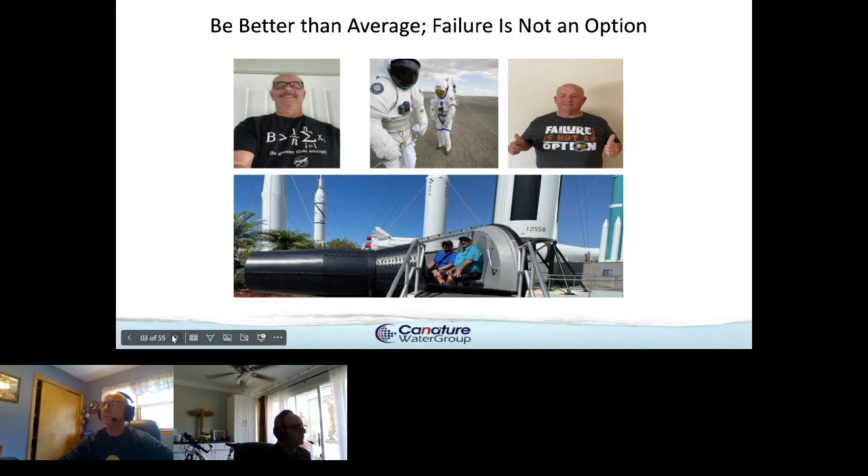Go ahead, Mike, take it away. Let's roll. So why water treatment?

You know what? You go on a call, maybe it's municipal water, and you do your regular job, and it never enters your mind that there's more to it or there should be more to it.

So with that said, your purpose today is to introduce you to the contamination issues that exist in the water supplies today. Oh, are there contamination issues? Fasten your seatbelt. So the process: we will introduce you to current contamination problems and let you understand how these problems can be overcome.

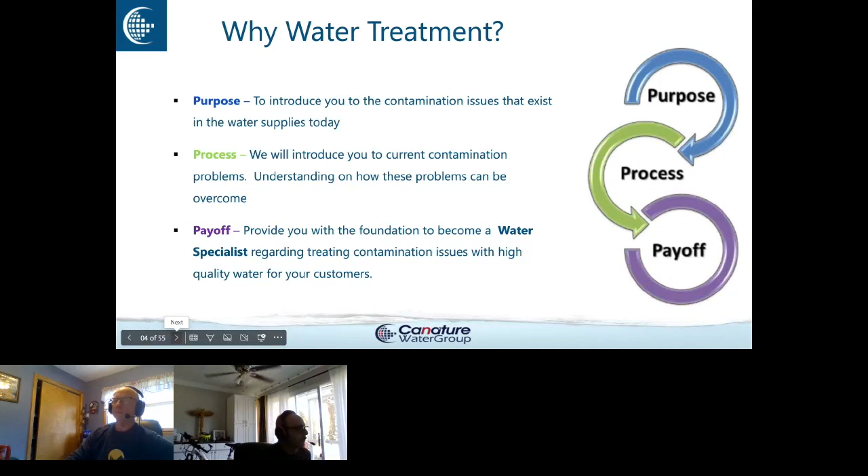And the payoff: provide you with the foundation to become a water specialist regarding treating contamination issues and making sure that your customers have the highest quality water available. Okay, click it, Leah.

All right, so let's talk about some of the biggies.

PFAS - have you ever heard of that? The forever chemical. Well, it's all over the news in the US, and we'll explain to you why possibly you've not heard about it in Canada.

Lead, microplastics - are you all dragging around those plastic bottles to chug-a-lug out of? Probably, right? Chlorine, chloramines, hardness, chromium. You remember the Erin Brockovich movie? That was about the contamination of chromium. Next slide.

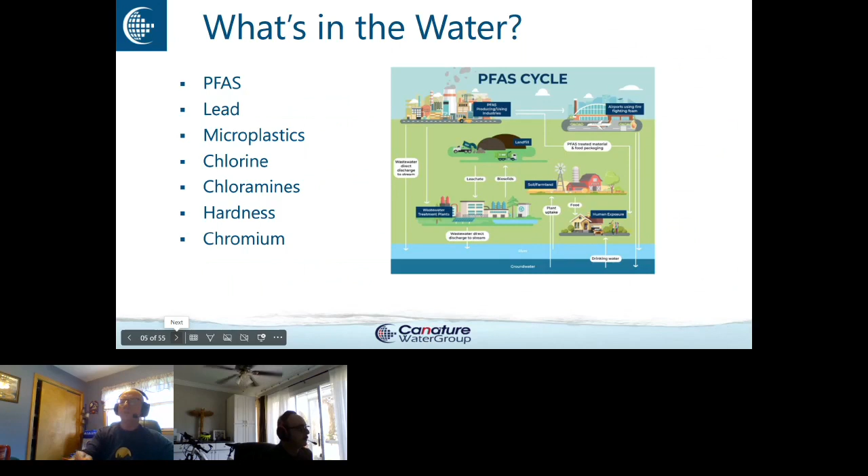All right, polling question number one. Go ahead - if a lake is clear and blue, is it safe to drink? True or false? Yeah, just grab a straw and put it right down in there.

All right, so go ahead and click it. So do you have the polls loaded, Leah? To see what the reaction is? I do, sorry, I was just trying to get back on stage.

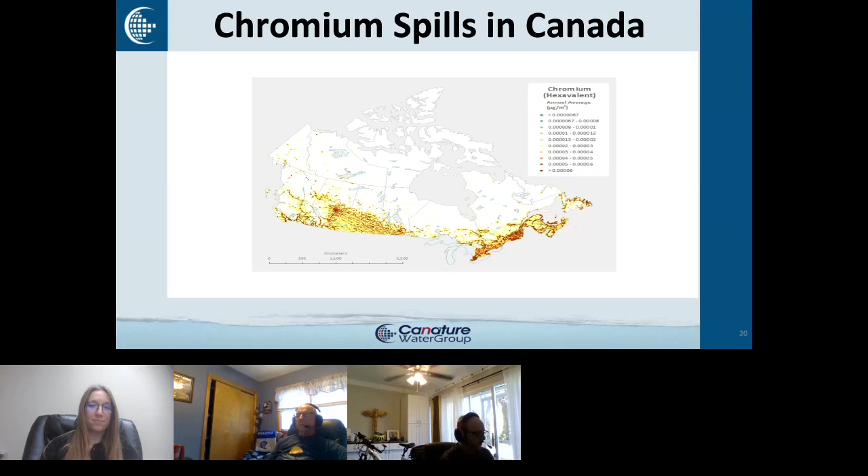All right, lead poisoning, a whole other thing, especially in children. It's a sad thing—a lot of our supply pipes are made of lead, especially on the lead up to the home, and those obviously should be changed out. But there are some things you can do inside the home to help protect your customers, and you can do a lead test—they're very easy to do. Next slide.

Here we have a map of chromium in Canada. Oh my gosh, it's there. All right, so take a look—is it in your area? Probably. Next slide.

All right, so let's take a look at some of the solutions.

Reverse osmosis is a solution for PFAS, and not that I'm going ahead and pumping my product, but nonetheless this is certified. You always want to use, especially when dealing with harmful substances—arsenic, barium, chromium—all of these substances that can cause immediate health concerns, products that are NSF certified for 58. There are other certifications, but they have nothing to do with taking the contaminants out. Don't be fooled. Next slide.

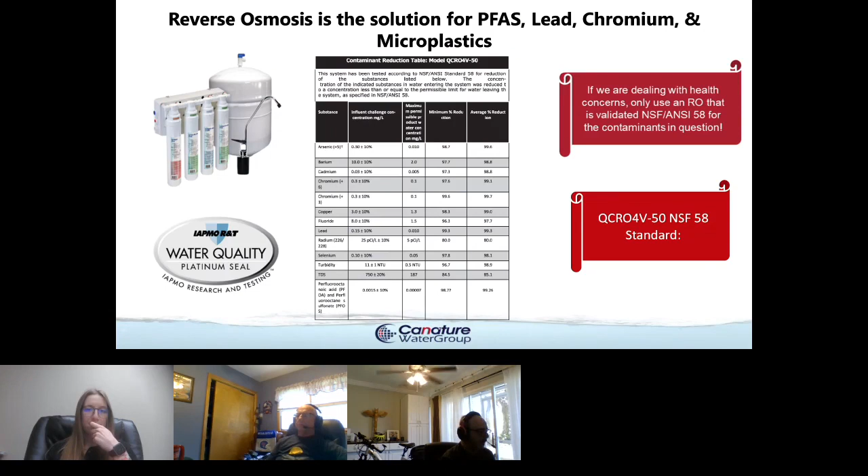All right, so making water safe, municipal water. Oh my gosh, the municipalities—you call it hydro in Canada, the water supply, is that what they call it? Okay, so Hydro Canada, they wouldn't send you anything that would be harmful in the water, would they? No, no way, they're going to make sure it's spiffy as can be, right?

All right, let's look at chlorine. Oh, they put that chlorine in there. Well, chlorine causes trihalomethanes, or THMs—that's when chlorine reacts with organic matter, that's the byproduct. And there's a lot of places in Canada that use chloramines. What is chloramine? This is a real good combo—chlorine and ammonia, give me a couple of shots of that, right? Well, that makes nitrosamines—DNA damaging, cancer causing disinfection byproducts that form when water is treated with disinfectants like chloramines. Next slide.

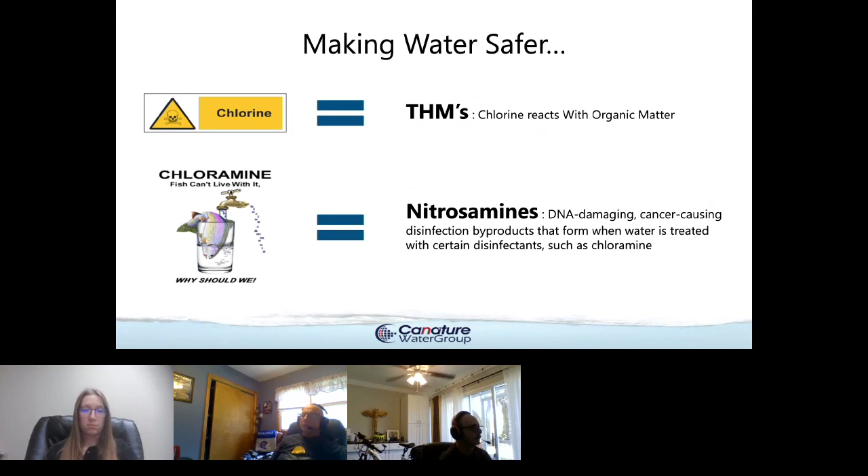All right, so let's take a look at one of the remedies. I'm done being Dr. Doom—let's fix it, let's fix it now. Yeah, Dr. Fix It here.

All right, so carbon, granular activated carbon or GAC, is generally accepted as the best all-around adsorbent—not absorbent like SpongeBob, this is an adsorbent, it sticks to the surface. It's available for removal of organic chemicals and organic contaminants. In addition, it's used for the removal of tannins, phenols, pesticides, detergents, trihalomethanes or THMs, and toxic organic compounds. So charcoal carbon filters are the most effective at removing chlorine particles such as sediment or VOCs, taste and odor. However, they are not effective at removing minerals, salts, and dissolved inorganics.

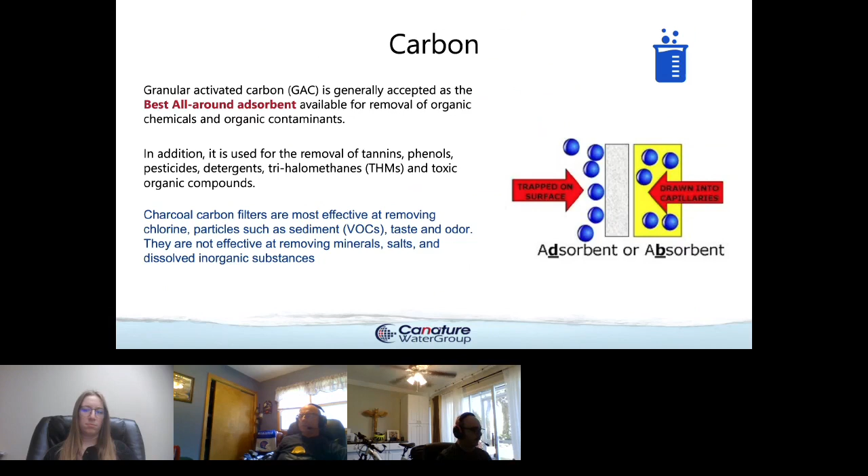So why remove chlorine and chloramines? I went on a job in Tampa, Florida for a huge condominium. I mean, it was like, I don't know how many stories, but a big building. And I'm not a plumber, I make no bones about it, but this was really big pipe, thick stuff. It ate right through it in 3 years. 3 years, think about it.

They're irritants to the eye, skin, and respiratory system. It damages plumbing and rubberized parts in the plumbing system. So what are you gonna do when these chloramines come for you? Next slide.

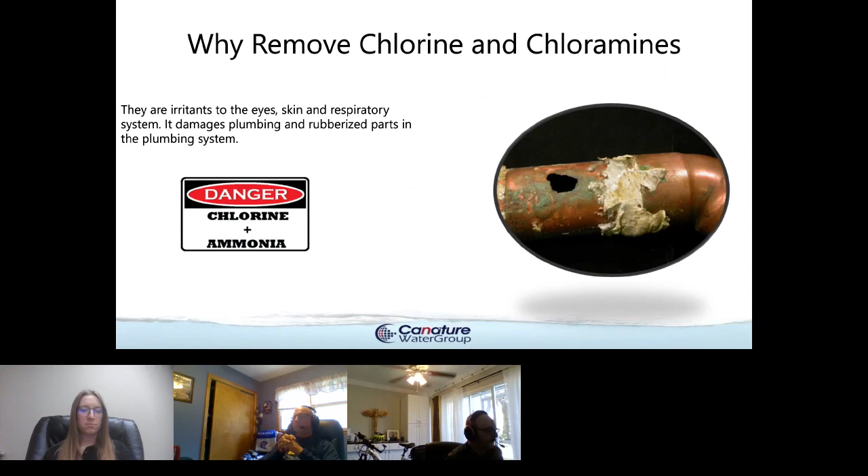All right, here we go. Leah, there you go, you're on board now. I'm back, all right, it's polling time.

Granular activated carbon removes hardness. True or false? Let me think. Did he say that? Oh, yes.

Okay, let's put our votes in. We got one vote in. It should be live already, guys. Come on, guys, take a shot. Oh, there we go, we got a couple more. All right, who said you miss 100% of the shots you don't take? You all know that? The great one, right?

Right, all right. Do we want to keep it open? Okay, let's give it another 10 seconds. Put our votes in, all right. Come on.

Okay, ding, all right, I think we got enough time. All right, so we're going to end the poll. So poll number 3, we had 4 votes for true and 3 votes for false. So a little bit torn. Let's see what the answer is. We got some people abstaining, hey? They're scared to answer correctly. We don't know who's saying what.

So the actual answer is false. Carbon has no ability to remove hardness. None at all, ladies and lassies. All right, next slide.

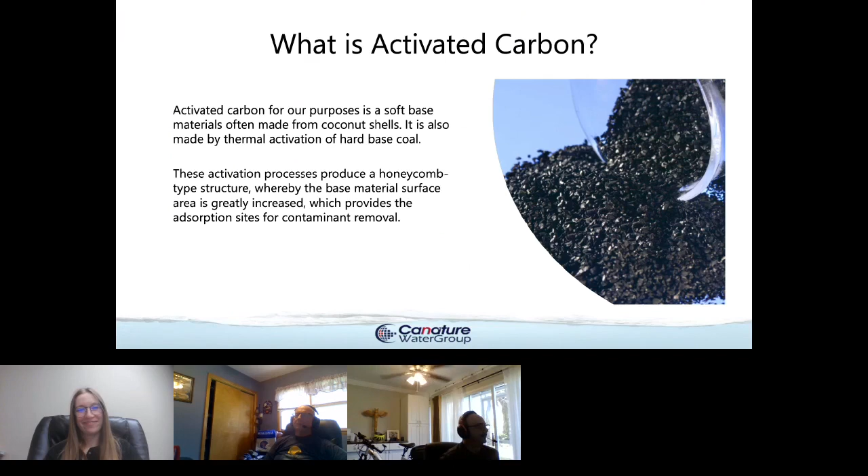So how does adsorption work? Adsorption is a physical process in which suspended matter, liquids, or gas adhere to the surface or the pores of the carbon in the absence of a chemical reaction. Adsorption is not the same as absorption, in which one substance is taken into the body, okay SpongeBob, of another substance. Adsorption is onto, it sticks to the carbon and will not come off. Absorption is into, not commonly used in water treatment. Next slide.

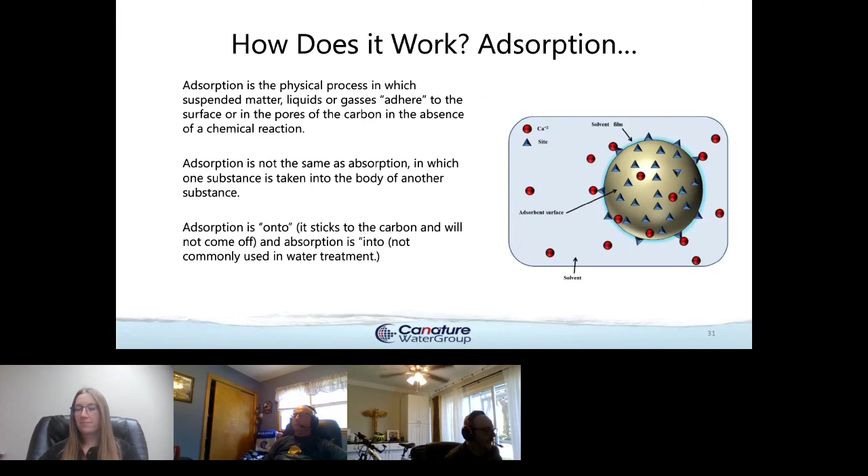All right, applications. Activated carbon has a super high affinity for chlorine, it takes out a ton. Proven reliability, excellent projected life expectancy. However, we recommend, not just us but the Water Quality Association, a minimum of 1 cubic foot. 1 cubic foot of carbon will be able to handle 3 gallons a minute, that's it for doing the job effectively. If you put one of these rinky-dink little cartridges on, it's not going to do the trick for you. So it reduces 1 part per million of free chlorine from 1 million gallons of water. Who said that, $1 million? In addition, carbon is used for the reduction of phenols, pesticides, detergents, trihalomethanes, THMs, and toxic organic compounds.

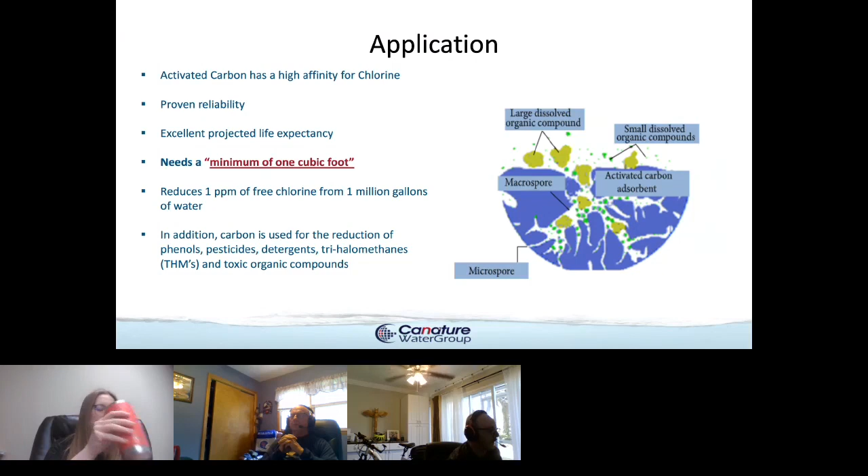Next. Hey, here we go again. Polling question number 4, all righty.

Activated carbon may be made from coconut shells. Let's go ahead and light up the polls. Do you have to put a lime in it? I don't know.

All right. We can't see who's saying what, so don't be afraid. Yeah, don't think that we see. Oh, I don't want to be wrong. They might see that I don't know. You know what? I did just vote myself this time. I haven't voted in the past, but I did vote true. All right. Good. That's a correctamundo. Oh, is it? Okay. I gotta submit it first.

Okay. I'm gonna end the poll. All right, last chance. And we've ended it. Okay, so we had 7 voted true, 3 voted false. So let's see what it is. It is true. Yeah. All right. All right, next.

Huh. Get the heck out of here. There's some coconuts. Coconuts are a great renewable source. You want to talk about renewability? Right here. You're looking at it. So coconut shell carbon is one of the most common carbons in use today. Unlike charcoal-based carbon, which is more expensive and more difficult to activate, coconut shells are easily converted to granular activated carbon. And here's the process.

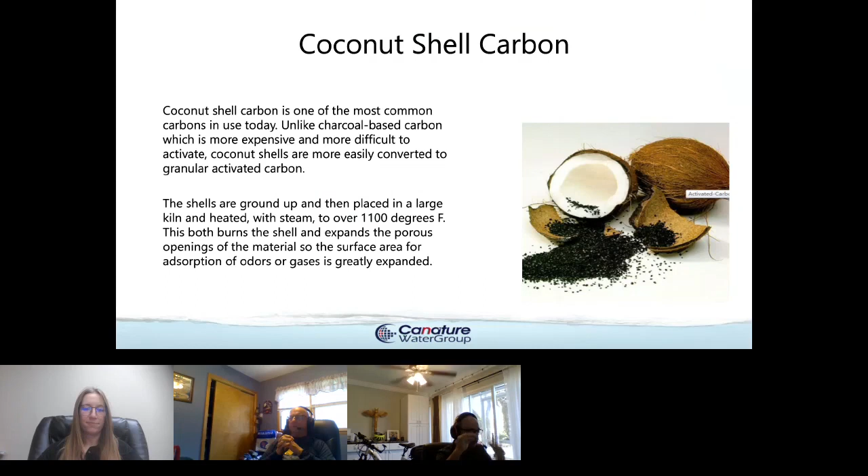The shells are ground up. They're placed in a large kiln heated with steam to over 1100 degrees Fahrenheit. This both burns the shell and expands the porous openings of the material. The surface area for adsorption of odors and gases is greatly expanded. Everybody get that, or you want me to slow down? All right. Coconut shell carbon is very effective, and it's a lot less expensive than bituminous coal, which is a great source. However, it's a lot more expensive and more difficult to get to. Next.

Look at this. Polling number 5. This one has different answers now, it's not just true or false. 1 pound of carbon has enough surface area to cover 100 square kilometers, the Great Bear Lake, 10 football fields, or the province of Alberta. Hmm. 10 Canadian football fields. Oh, man.

Did you know the Great Bear Lake is the largest lake completely in Canada? No, I did not. All right, listen, I lived in Canada for 5 years. I know all this stuff.

All right, I'm gonna end the poll, guys. Last chance. Forever hold your peace. Oh, someone else voted. Good, you made it in. All right, it's ended. So we had 5 votes on 100 square kilometers. We had 0 votes for Great Bear Lake. We had 1 vote for 10 football fields, and then we had 5 votes for the province. So let us see what is correct. Boom. Oh, it's 10 Canadian football fields. Yeah. Great surface area. All right. Next. There it is. There's a picture of it. Counted 10 football fields.

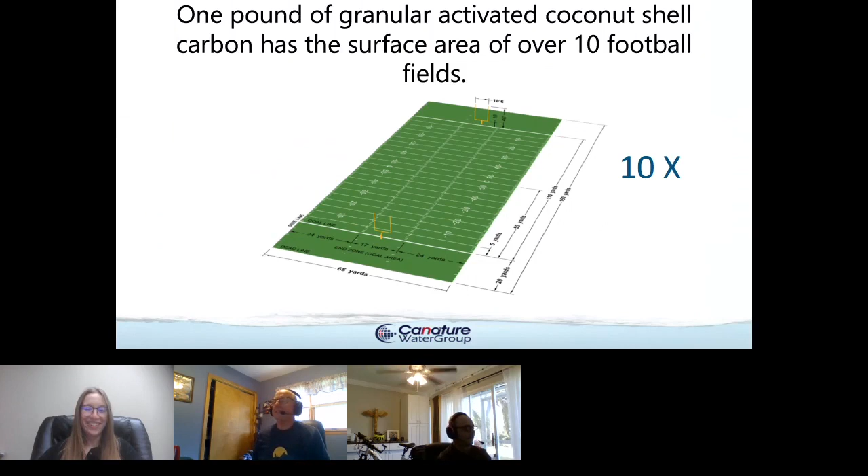All right, next. Contact time is of utmost importance. Organics and toxic organics require even more contact time than chlorine or chloramines. Here's some examples. Free chlorine, 1 to 2 minutes. That's what I'm saying. You need a cubic foot to be able to do the job. Chloramines, 3 to 4 minutes. Organics, 5 to 6 minutes. And toxic organics, 8 to 10 minutes. So if you have toxic organics and you're using carbon to remove it, then you're probably going to have to go larger than 1 cubic foot, right? Just as an example. Next slide.

All right, let's talk about catalytic carbon. Catalytic carbon is regular carbon on steroids. Catalytic carbon is created by altering the surface structure of activated carbon. It does a better job, it lasts longer, and you can bring it back around. Backwashing it refurbs it, and it's ready to go again. It is modified by gas processing to change the electronic structure. It creates a higher level of catalytic activity on carbon for reducing chloramines and sulfur in the water. This added catalytic functionality is much greater than that found in traditional activated carbons. I'm trying to click to the next slide.

Well, hold on, Mike. We just got a question. It says, the city has been doing their spring runoff water cleanup, which I believe uses chloramines. Would GAC be the best filter of choice? No, that's not correct. You would want to use catalytic carbon. I'll tell you, when I first moved to Florida, they had chloramines, and I put a regular GAC filter on my house. It'll run right through it. Didn't touch it. You have to use catalytic carbon. It's the only thing that'll take it out.

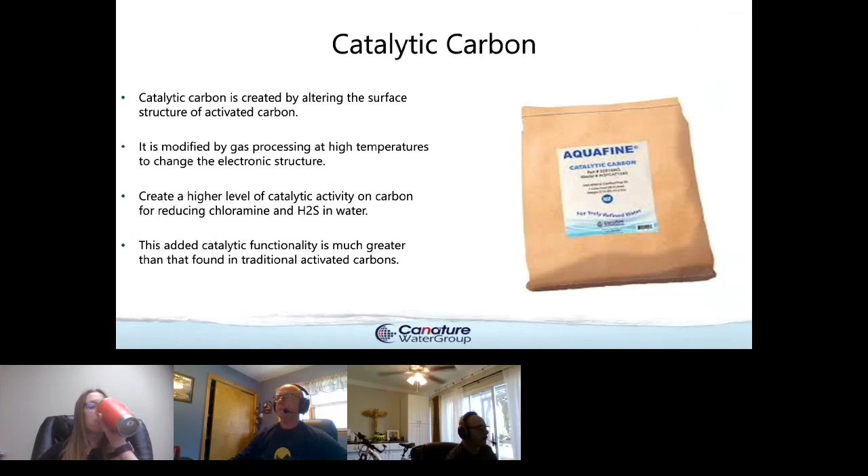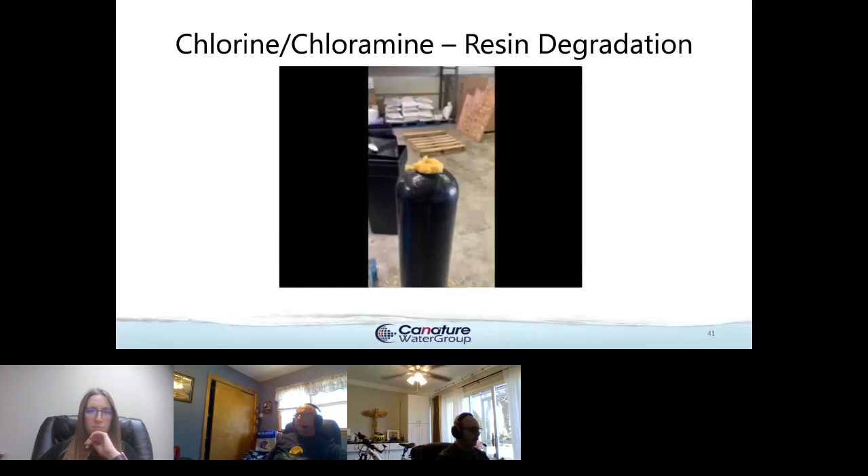So if you looked at it, it would be like a ball of string. And what holds that string together is the crosslinks. Well, what happens is that it oxidizes the crosslinks, breaks it apart, and this is what happens. It turns to jelly. Pretty soon you have no flow, and this does nothing except block the water. So when there's chloramines or chlorine, you have to put carbon in front of it to protect it. And you're protecting the people from other stuff. We talked about it, VOCs, etc., right?

Okay. Next slide. You have to click it again.

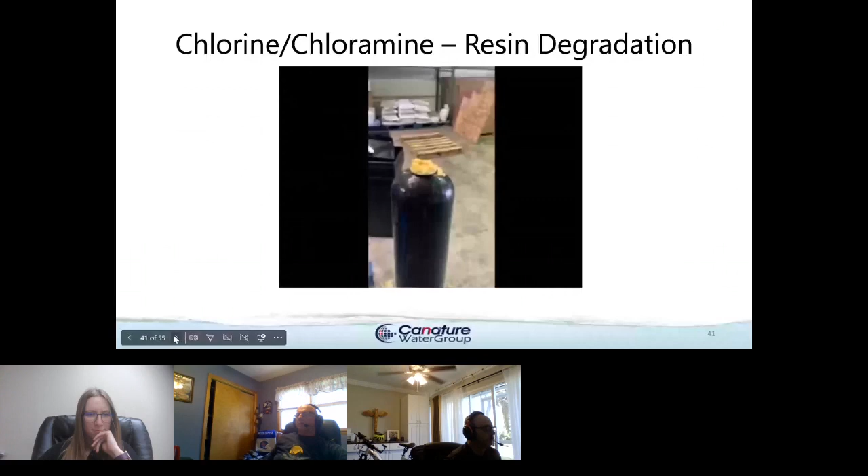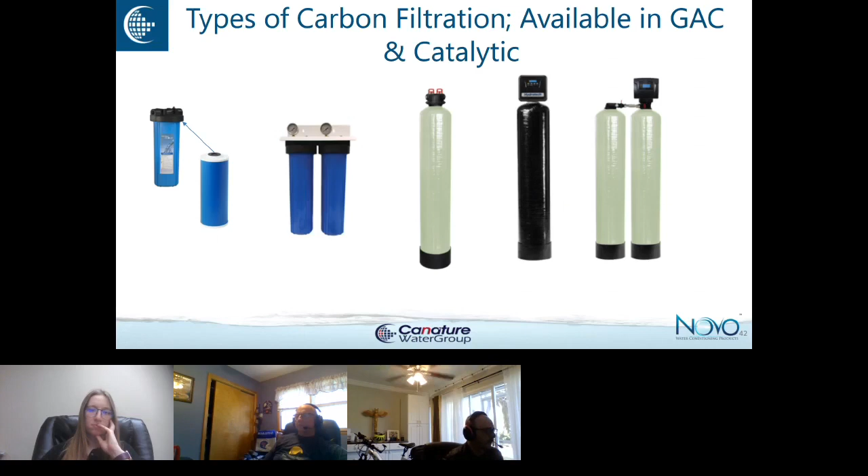Well, huh, number 6. All right. So hey, what's the best way to find out what's in the water? You taste it, you smell it, you test it, or you let the dog drink it. Or Mikey. We have a few comedians in here because the last one did get a few votes. Yeah, give it to the dog. Who let the dog out, right? All right. Couple more seconds. I'm going to close it, guys. Get your votes in. All righty.

So we had nobody who tasted it, so that might be good. But we had one that said smell it. We had 10 that said test it, and then we had 2 comedians that voted let the dog drink it. If the dog doesn't fall over, it's good. I'm with the 10 people. All right, let's see, the answer is obviously... Yeah, go ahead, click it down. There, yeah, test it. Test it. It's the only way. There can only be one.

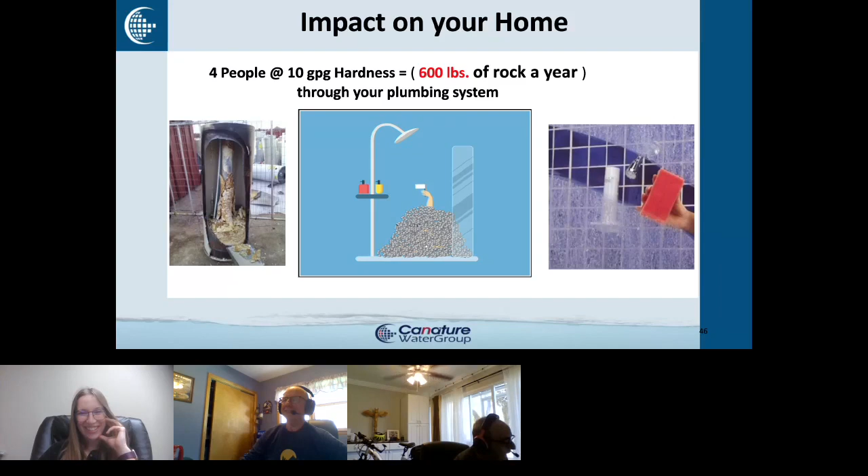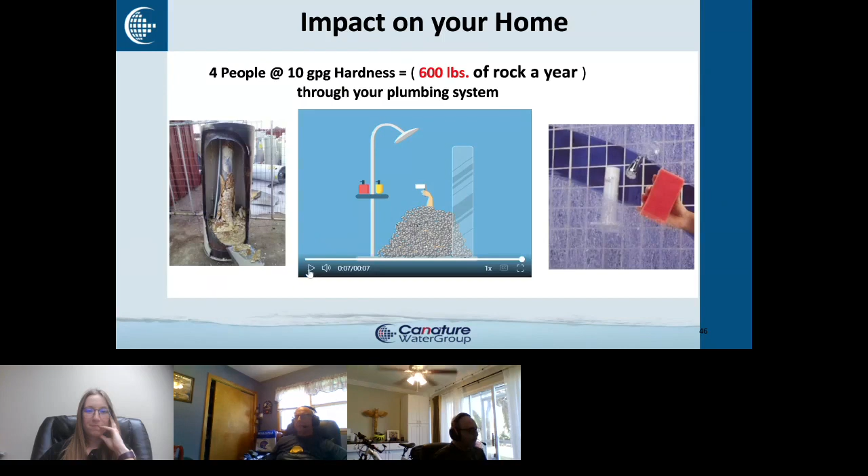Hit it again. All right, so with that said, the impact on your home: 4 people at 10 grains per gallon of hardness is equal to 600 pounds of rock a year going through the system. That's not like chicken feed, all right? That's not nothing. That's a lot of stuff. Take a look at this water heater on the left. How many years was that in, Dave?

Yeah, I found that it was in service for only 4 years, and it was being protected by the template assisted crystallization, the TAC media. Looks like it did a great job, huh? Oh, it's not working. All right, next slide.

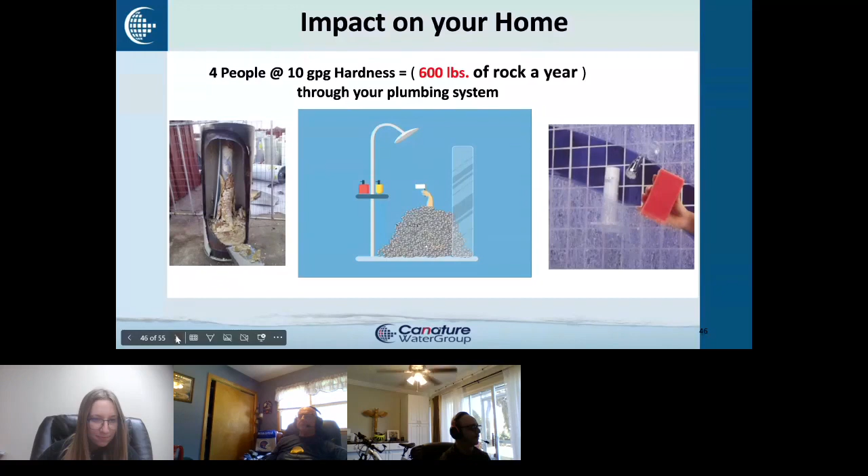All right, third-party certification. I can't emphasize this enough that you should make sure products you're using are certified. And don't let them use the leaching certification because that doesn't tell you anything. In other words, the vessel itself isn't leaching contamination into the water. I mean, that's important, but you're putting equipment on to accomplish a goal. Make sure that it's been certified for that. So the Battelle study by the WQA had that done. It proves that placing a salt regenerating water softener ahead of a water using appliance makes those appliances more efficient. Calcium hardness makes appliances inefficient and fail sooner.

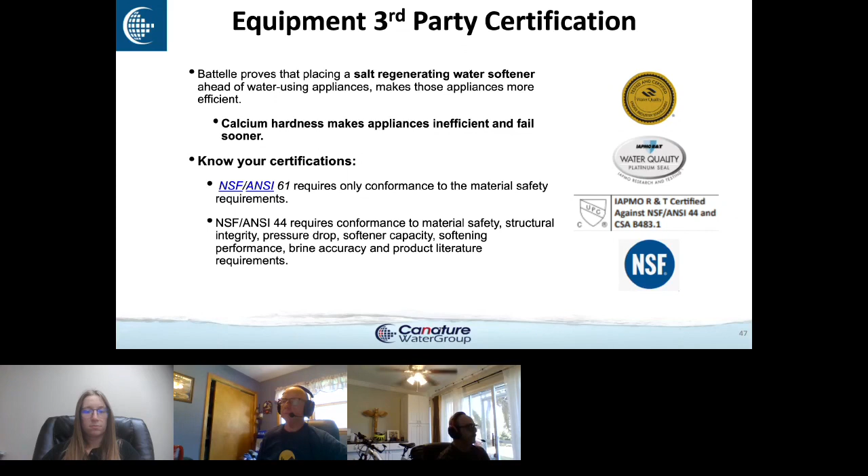So know your certification. NSF ANSI 61 requires only conformance to the material safety. NSF ANSI 44 requires conformance to material safety, structural integrity, pressure drop, softener capacity, softening performance, brine accuracy, and product literature requirements. NSF, IAPMO, CWQA, all of these are valid certifications. If they had the certification done in Hungary, don't count on it. Make sure it's a North American certification and that it's ANSI 44. NSF ANSI 44. That's the one you want to look for. Go.

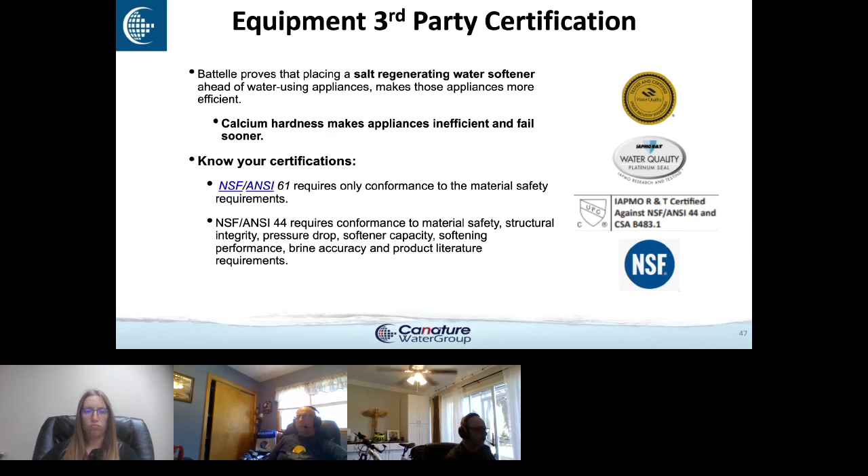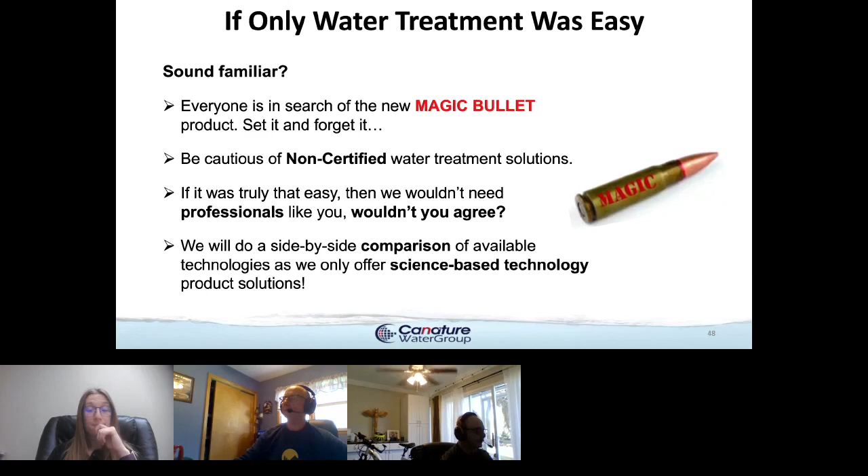And somebody says you see a bicycle in your office there, Mike. Yeah, I belong to two bike clubs, actually. Mike the bike. I do about 40 miles a day. Yeah. All right, next.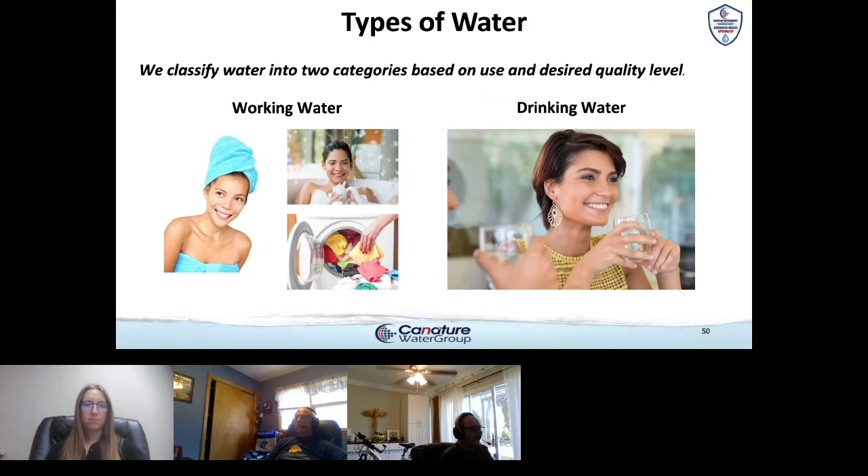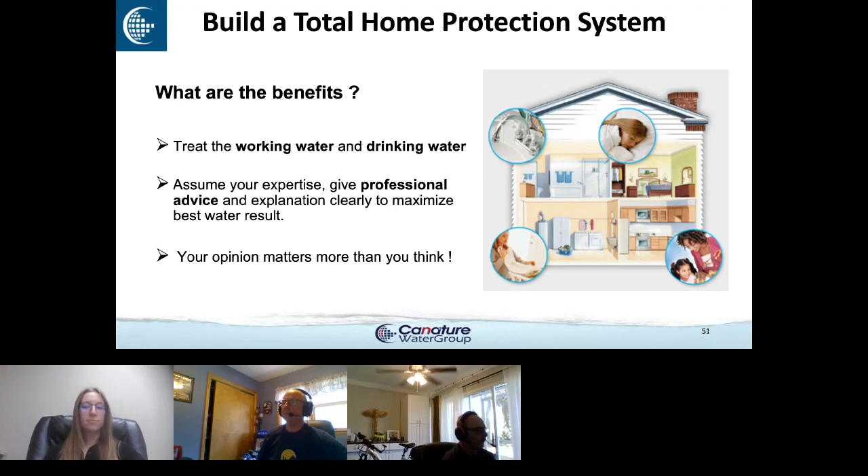Well, what we recommend is the HTO first, then a UV light to kill all of these Cryptosporidium, Giardia, Legionella, which chlorine and chloramines have a difficult time controlling. If your customer has immune deficiency, this stuff will take them out. I've done treatment for a lot of people with immune deficiency, and you have to be very careful to protect their lives. So, and then reverse osmosis or an ultrafilter. Those are two good bets.

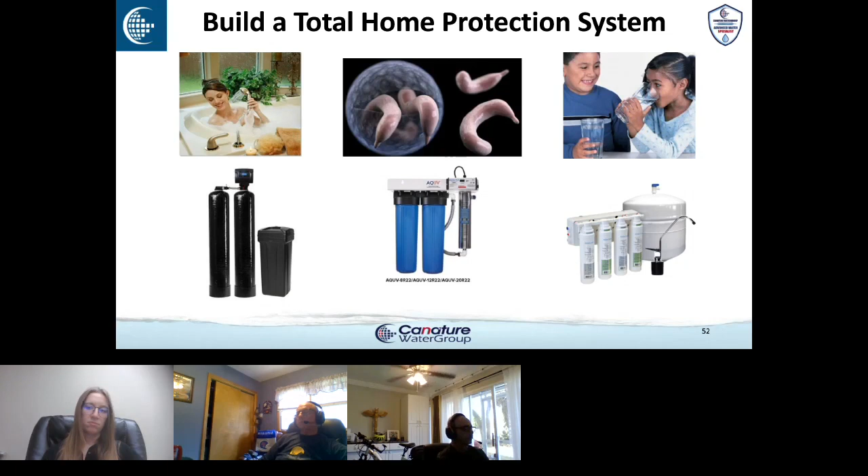Next, water analysis, for correct sizing and application of water conditioning equipment. It's not just like put it on there, right? A water analysis is required. A basic water analysis includes tests for the following: hardness, iron, pH, TDS, manganese, and tannins.

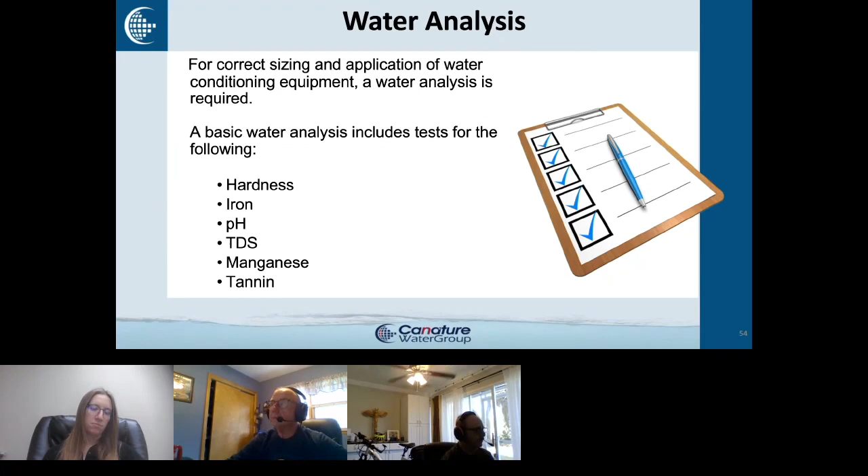pH, Dave, what does that stand for? Well, it stands for the potential of hydrogen. Potential of hydrogen. All right, next slide.